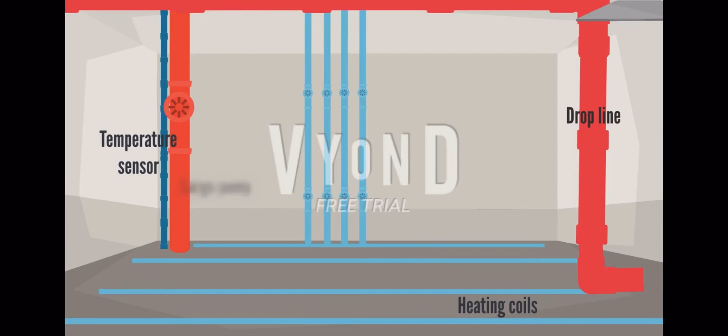Cargo pump, which must be located in the lowest place in the tank to pump out the maximum possible amount of cargo. It is run by the shaft, which is near the pump. Also, there is a temperature sensor fitted in the pump.

Okay, next, the ventilation of the tank. Ventilation of the tank controls the air, vapor, and inert gas, releasing it or keeping it in.

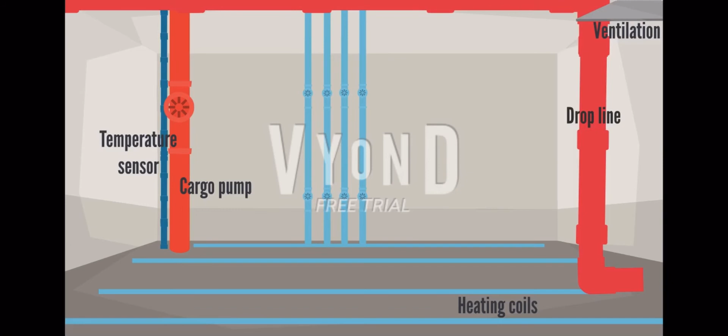Opening for tank cleaning. Through these things, we connect our cleaning equipment. It sprays water or chemical liquid, depending on the cargo, at very high pressure. We'll explain to you about tank washing a little bit later.

So the next is the radar level gauge. It gives you precise data for custody transfer, inventory management, and loss control. It works on the principle used by a radar set or an echo sounder. Pulses are transmitted from the top of the tank, and the time taken for them to be reflected back is measured and displayed as ullage or depth.

High-level overflow alarm. It's located on top, and it sounds when the tank is completely full.

Pipeline system. Pipelines are simply what their name suggests: lengths of steel pipes that connect groups of cargo tanks to one another, by which those tanks are loaded and discharged. There are three basic types of pipeline systems: direct system, ring main system, and free flow system.

We use a direct system on board our ship. This system is commonly used on tankers as it facilitates quick loading and discharging of the cargo. This is the simplest type of pipeline system. It takes oil directly from the tank to the pump, reducing friction. This has the effect of increasing the rate of discharge, while at the same time improving the tank suction.

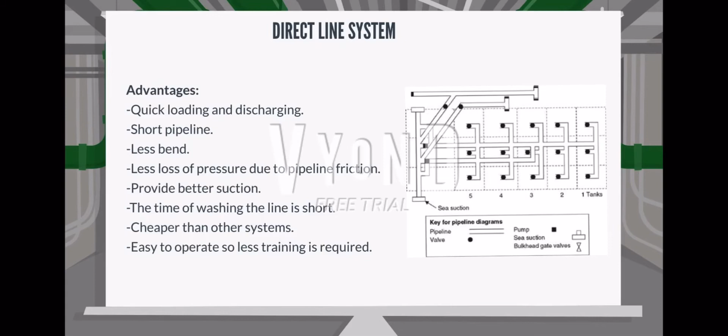Another disadvantage is that the direct line system is not as versatile as the ring main system, and problems in the event of faulty valves or leaking pipelines could prove more difficult to circumvent.

The other lines lying on deck are the cargo vent line, main cargo line, crude oil washing line, and MARPOL line. We have already mentioned the first three, but the last one might be unknown to you. MARPOL lines are used during the stripping operation to discharge the last part of the cargo from the ship.

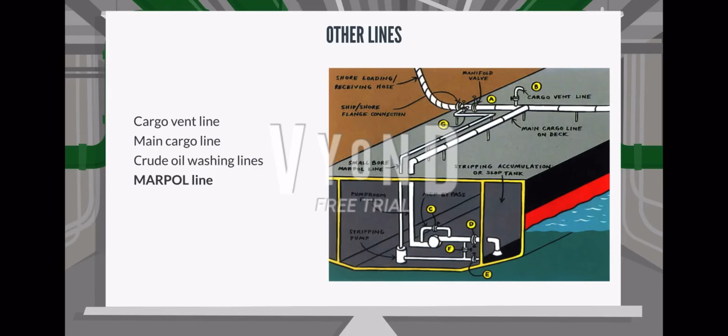Remember those lines, we will discuss the stripping and crude oil washing systems later. So now let's talk about the discharge operations.

First, a tanker vessel arriving at the oil terminal has to be properly moored for the cargo handling process, and its position has to be continuously controlled during the unloading time. Moreover, the ship's and terminal's representatives have to discuss all technical issues and procedures before the transshipment process may begin.

Discharging rate and pressure of discharge on the ship manifolds should never exceed the agreed value. The quantity of discharged cargo for each watch should be recorded in the cargo logbook.

So, the process of crude oil discharging. Before starting the unloading process, a piping system line-up, an arrangement between tank farm and terminal, and an agreement between the vessel and terminal have to be set.

Then the vessel's marine loading arms are connected during the unloading process. For crude oil, usually 3 loading arms are connected.

The line has to be set by choosing dedicated tanks and pumps on the vessel, and by opening or closing the relevant lines and valves. So line up and start the inert gas plant with the recirculation valve, returning gas to the funnel until the pumps start running.

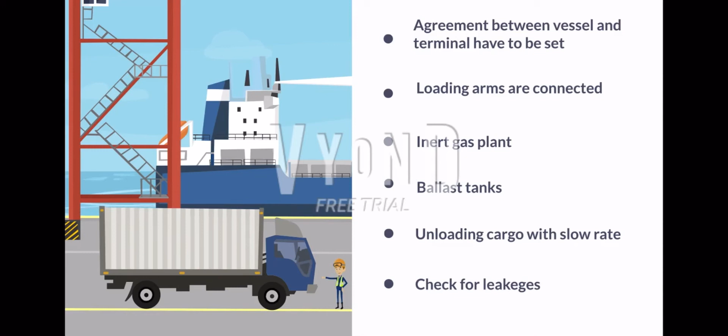Check the pipelines and pumps for leakages. If there are no leakages, increase the discharging rate to the agreed maximum rate. The unloading cargo starts with the full rate.

During discharging, the parameters and infrastructure integrity have to be inspected on a regular basis. In a simplistic way, in the final stage, the unloading of cargo with reduced rate takes place, and the tanker finishes discharging cargo by stripping all cargo tanks.

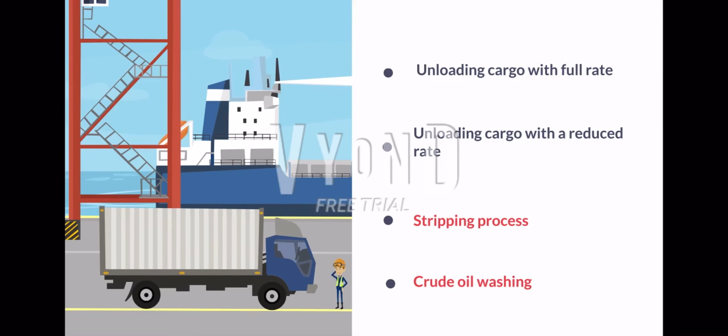At the end of the transshipment, we deal with the stripping process and washing of tanks from sediment. Then the pumps stop, relevant valves are closed, and the loading arms are disconnected.

Below, there are given technical parameters of the crude oil discharging process at different stages.

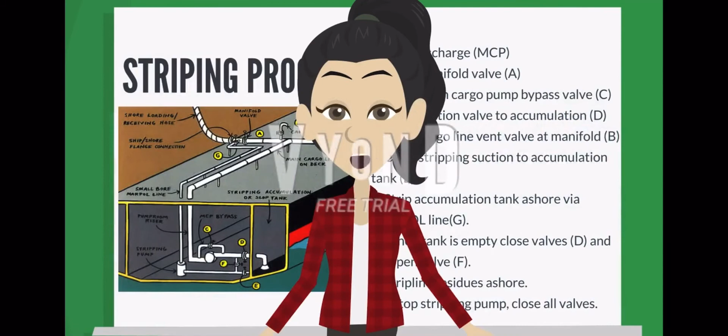So, the stripping system. The final part of the discharge operation, but one of the most important, is stripping the remaining cargo from the pump room, piping, and cargo piping.

When cargo discharge has been completed on a cargo system, the pipeline system should also be discharged ashore. The ideal arrangement for this operation is a stripping system which includes a separate, small diameter discharge line to the midship manifold, with connection to each cargo manifold outboard of the manifold valve. If that arrangement is available, the following procedure can be used.

Stop discharge, close manifold valve, open main cargo pump bypass valve, open suction valve to accumulation, open cargo line vent valve at manifold, open stripping suction to accumulation tank, strip accumulation tank ashore via the MARPOL line. When the tank is empty, close valves D and E and open valve F. Strip the remaining line ashore, stop the stripping pump, and close all valves.

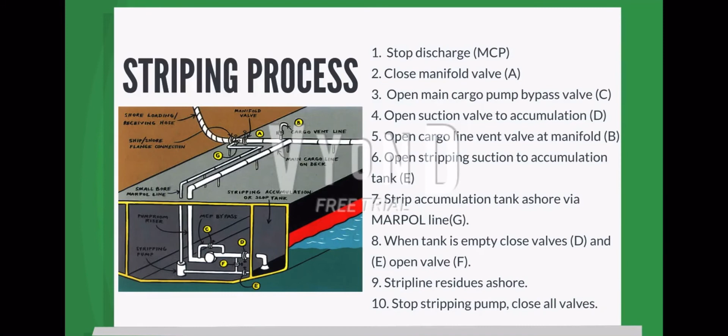Now let's talk about the last process: crude oil washing. As tanker ships carry different grades of fuel oil in the same cargo tanks, it's important that the tanks are always washed before loading fresh cargo, because residues from the last cargo can damage the new cargo and cause a loss.

The process of crude oil washing is actually very easy. Crude oil is pumped back and preheated in the slop tank, then sprayed back via high pressure nozzles in the cargo tanks onto the walls of the tank. The sediments sticking to the tank dissolve and convert into usable cargo, which we can pump out to shore tanks. This process is known as crude oil washing, or COW.

Upon washing with the crude oil, the tank atmosphere becomes safe and non-flammable, and this is done with proper operation of the inert gas system. But that does not absolve us from taking measures restricting ignition sources in the tank.

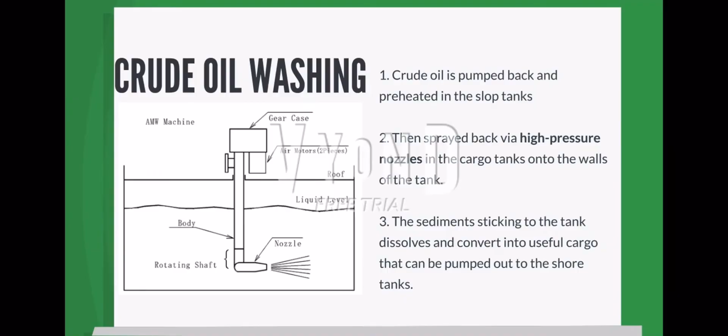Preparation for dry docking: all departments in charge confirm that repairs assigned under their departments are completed successfully, with tests and surveys carried out. Check rudder plug and vent, and also check if anodes are fitted back on the rudder.

Check all double bottom tank plugs are secured. Check echo sounder and log are fitted and covers removed. Check if the propeller and rudder are clear from any obstruction. Check if anchor and anchor chain are secured on board. Check all external connections, shore water supply and shore power cables are removed.

Check inside the ship all repairs are done, overboard valves are in place, and secure any moving item inside the ship.

Check soundings of all tanks and match them with the values obtained prior to entering the dry dock. Check stability and trim of the ship; positive GM should be maintained at all times. Go through the checklist again, and the satisfactory checklist is to be signed by the master.

When flooding reaches the overboard valve level, stop it and check all valves and the stern tube for leaks. Give instruction to every crew member to be vigilant while undocking.

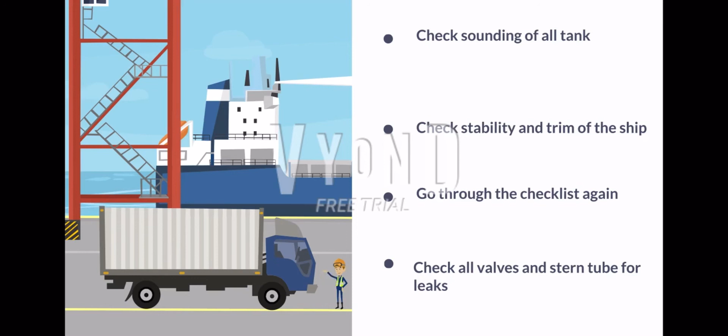The last part of our informative journey is documentation and guidelines for tanker operation. There are lots of regulations and laws which seafarers have to know before running any tanker operation. We will mention them below.

Firstly, SOLAS, which includes fire safety equipment requirements much stricter than on other ships because the risk of fire on tankers is higher. Also MARPOL, which includes requirements connected to the double hull and protective location of segregated ballast tanks, because even in loaded condition the ship has to survive after any collision.

ISM code, or International Safety Management, was developed in order to achieve incident-free operation, and every ship operator or port operation has to study it. As per ISM, companies have to supply their vessel and crew with all required equipment, instruction, and facilities. Before every operation, the master must hold meetings with plans and instructions, and all checklists have to be completed.

TMSA stands for Tanker Management and Self-Assessment. It was introduced as a tool to help improve management on tanker ships and increase awareness of the operators. Its publications include feedback from the industry, which is more practical because it gives direct feedback, and feedback is always a way to improve the system.